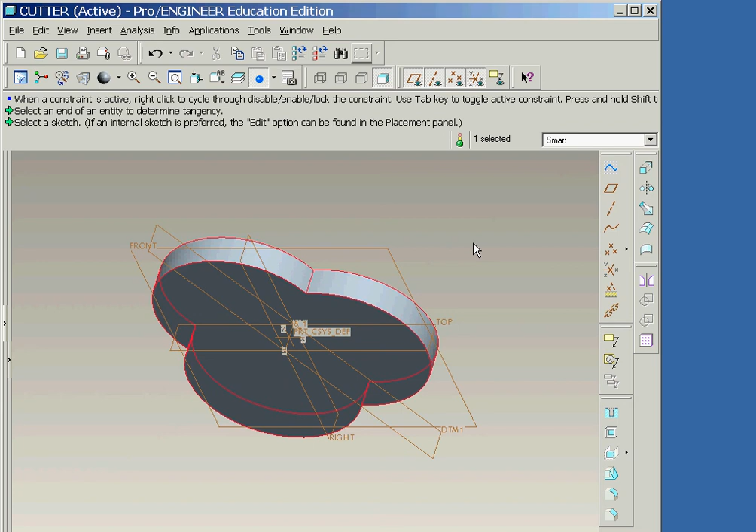In this session, we will create the base feature and center hole of the 3-tooth cutter. We will begin at a point after starting a new part using the default template.

The first feature that we'll add is a datum axis that will be located at the intersection of the right and top datum planes. We will first select both of these planes by holding down the Control key so that multiple items can be selected. And then click on the Datum Axis tool icon. As we can see, a new axis, A1, has been created.

We will now create a new datum plane that goes through the A1 axis and is at an angle to the right datum plane. But this time we will select the command icon before we select the graphical objects. Therefore, we will start by clicking the mouse while it is positioned away from any object in order to make sure that nothing is selected. Then we'll click on the Datum Plane tool icon. Now we will click on the A1 axis.

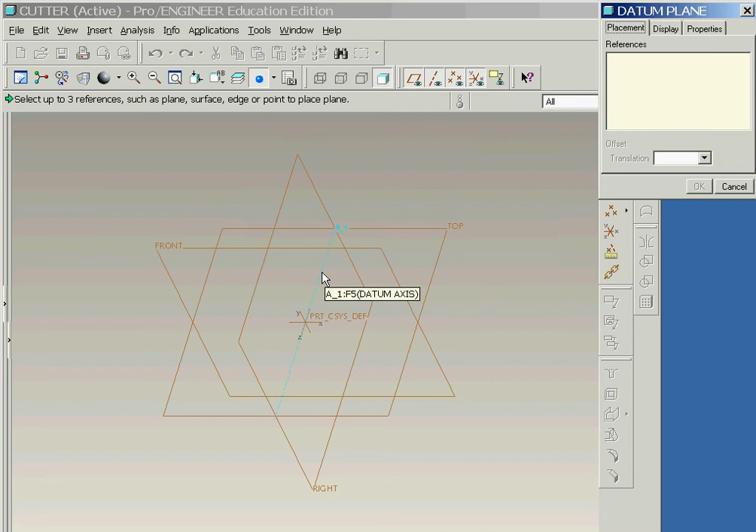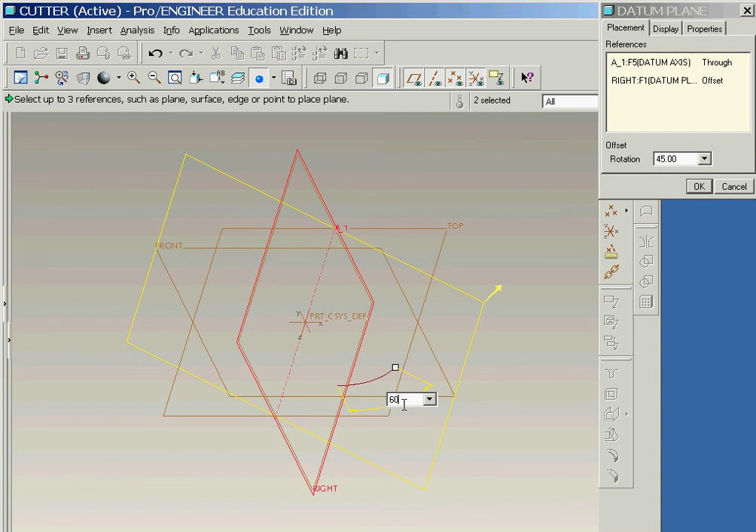As you can see, the new datum plane is shown in preview mode, and the A1 axis is listed in the datum plane dialog window with the constraint of through. We will now hold down the Control key and then select the right datum plane. Next, we double-click on the angle and set it to 60. And then click on the OK button of the datum plane dialog window.

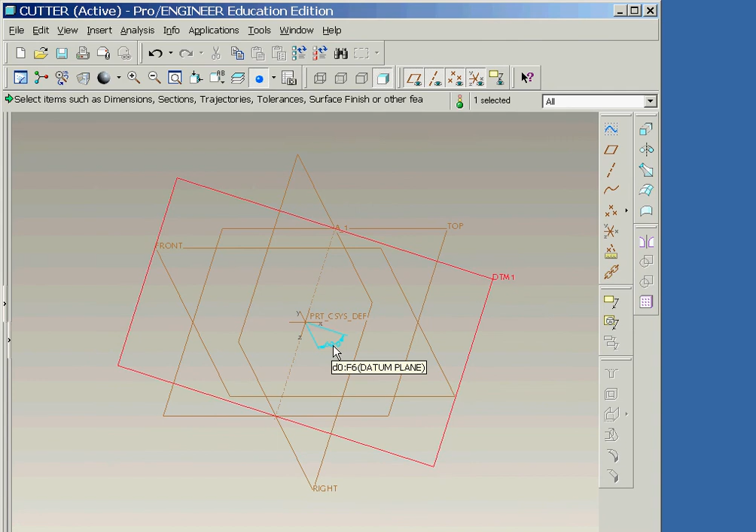In order to illustrate how our new datum plane can be modified, we will now double-click on this new DTM1 datum plane, followed by double-clicking on the 60-degree angle. We will now key in a value of 30, followed by selecting the Regenerate icon.

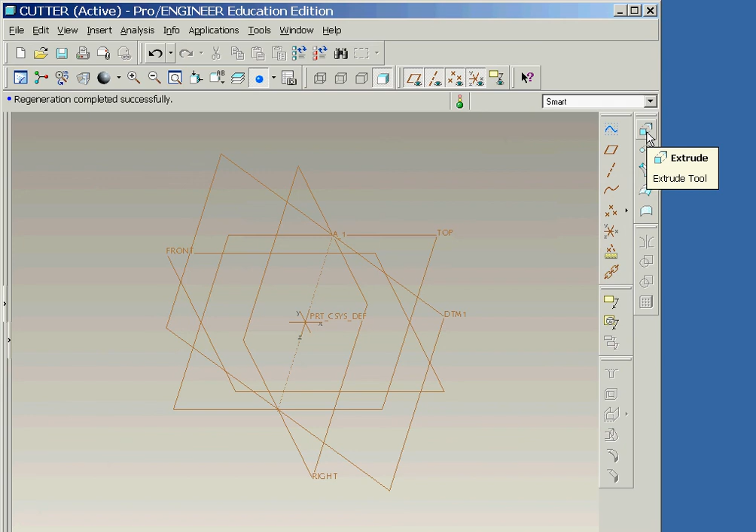We will now begin the process of creating the base feature of the cutter. We will be creating an extruded protrusion, so we will click on that icon now. In the dashboard, we will set the depth specification so that the extrusion occurs on both sides of the sketch plane and the depth is set to 2 units. And then click on Placement and Define, followed by clicking on the front datum plane in order to define it as our sketch plane.

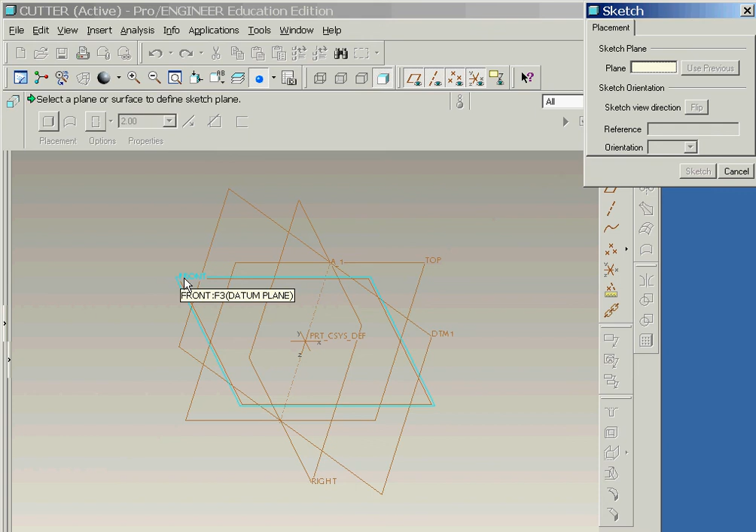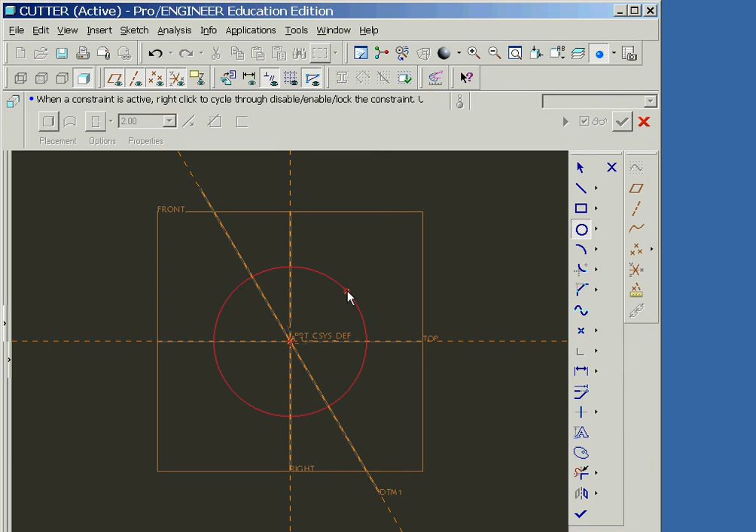Now we will click on the Sketch button to enter Sketcher. In order to add our new datum plane as a reference, we will now click on the datum plane and then close the References window. Next, we'll click the right mouse button and select the Circle option. Now we will sketch the circle shown here that is centered at the intersection of our references, and then set its diameter to 8 units.

While the circle is selected, we will click the right mouse button and change the circle to a construction circle. Next, we will sketch the circle shown here, and then set its diameter to 12. We will now sketch a second solid circle that is the same size as the first circle, which can be seen in the sketch by the R1 symbol.

Finally, we'll sketch a third circle whose center is directly under the circle that we just created. Notice that Pro E will help us snap to this position. And then we'll move the mouse outward until we see the R1 symbol again. We'll now select each of these circles that we just created and then click the right mouse button and convert them to construction circles.

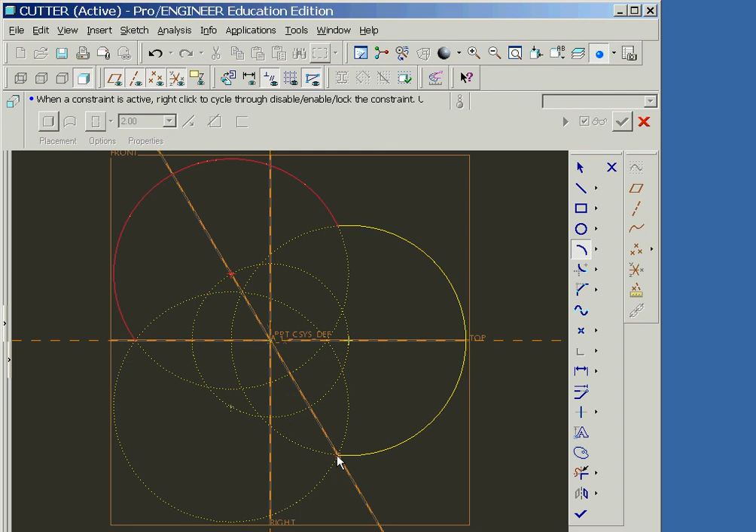We'll now select the Create Arc by 3-point icon and then sketch the 3 arcs shown here. We'll now select the Continue icon and then verify and accept the new feature.

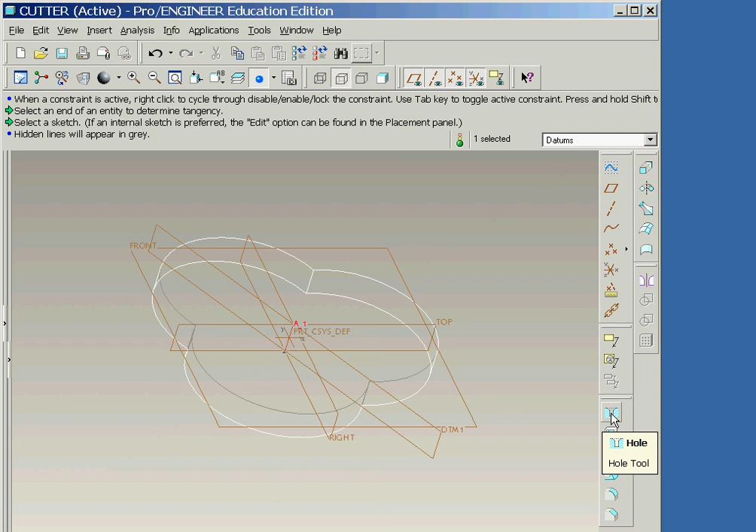Next, we will add a centered hole that is aligned with the A1 axis. We will start by selecting the A1 axis after setting a filter at the bottom of the screen to datums. Now we will click on the hole icon. In the dashboard area, we will now change the diameter to 8 units.

Next, we'll click in the Shape slide-up panel area and then change the depth specification to Through All on both sides. Finally, we will verify and accept the hole.